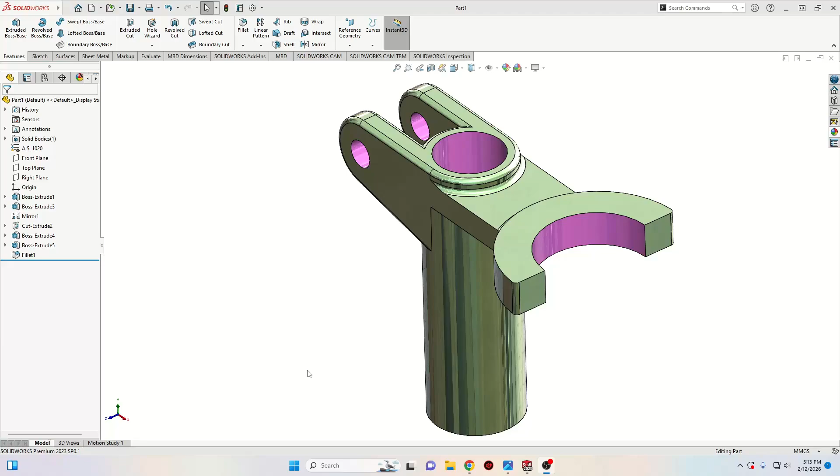My name is Alex and today we're gonna make this easy exercise in SolidWorks. And we have here the drawing. This is it. And let's go ahead and do this. First, let's open a new SolidWorks document, select your part and press OK. Now let's make this plane white.

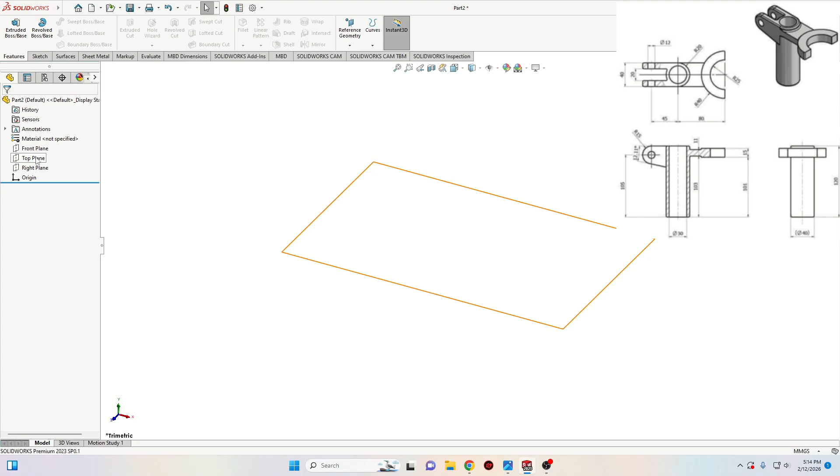Now we'll start with a sketch in the top plane. And here we'll make two circles. So select circle, make two of them like this, and now with smart dimension let's define them. First, this one, the small one, will have the diameter 30 millimeters. And the big one will have it 40.

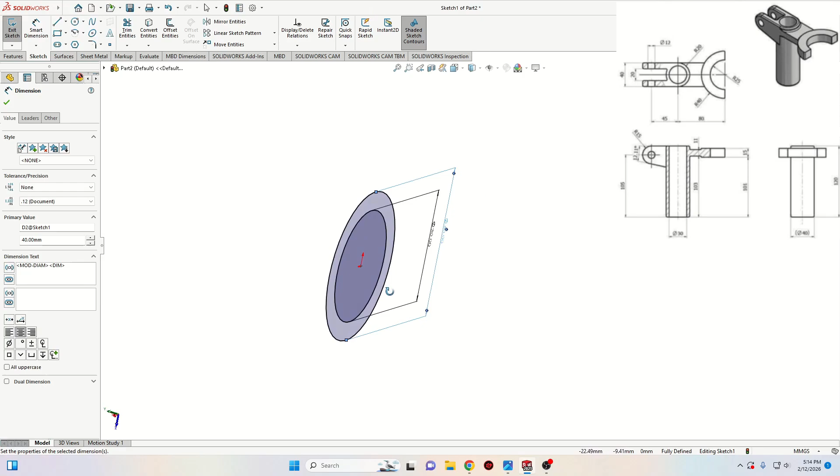Now let's go to features. And let's use Extruded Boss Base command. And here we're gonna keep it blind and the depth will be 120 millimeters. Press OK.

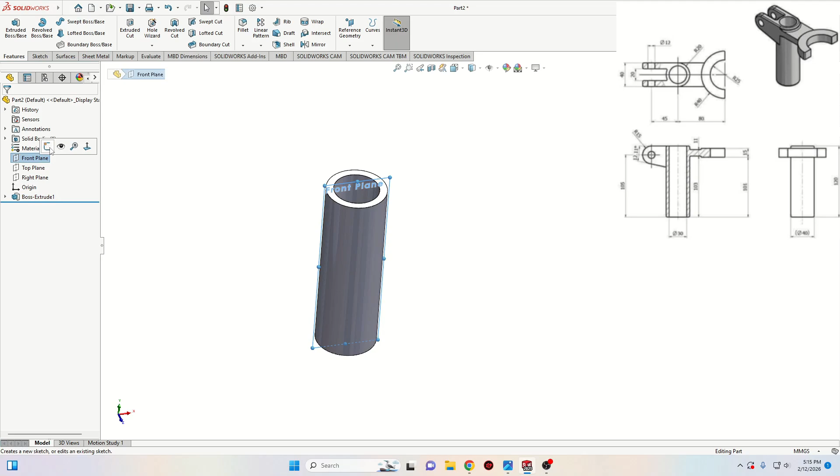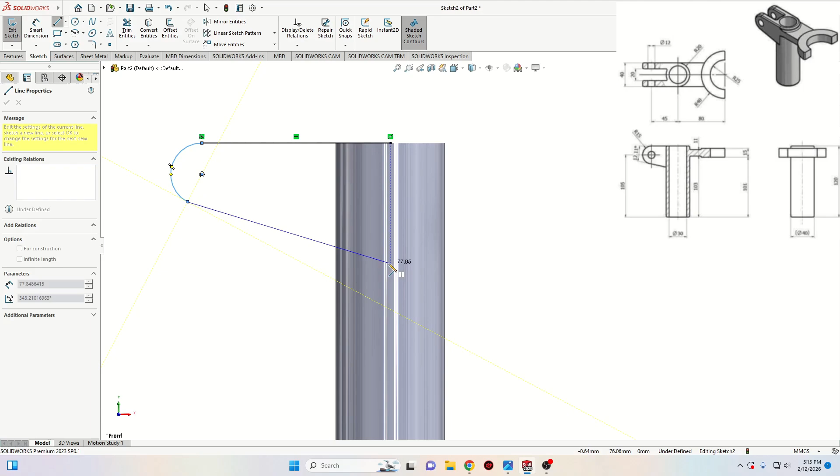Now let's open a new sketch in the front plane. And here select line and let's make the next sketch. We're gonna start from this midpoint and we'll go like this, and then we'll make here an arc. So if you go away from this point and then you go back, the line will transform into an arc. Let's make here an arc and then we'll close the sketch like this. One line here and one back up to this point.

Now select this point and select here make tangent. Alright, now with smart dimension let's give some dimensions. First, from this center point to this line here will be 45 millimeters. And then this arc will have the radius 15. And now the angle from this line to this one here will be 12.11.

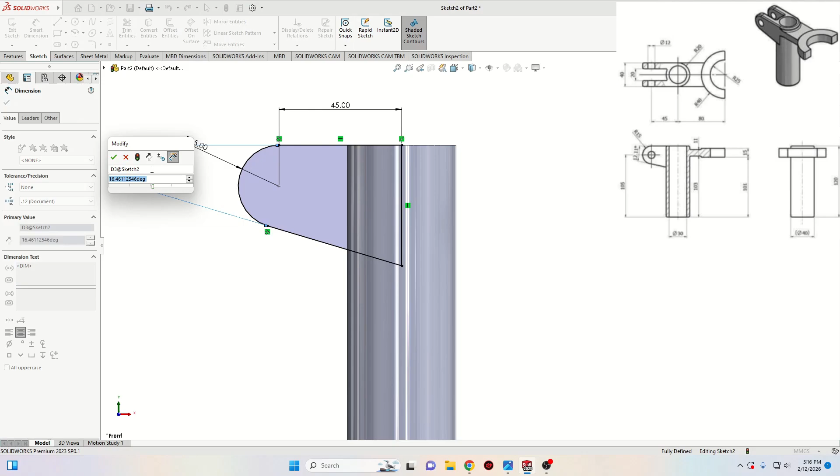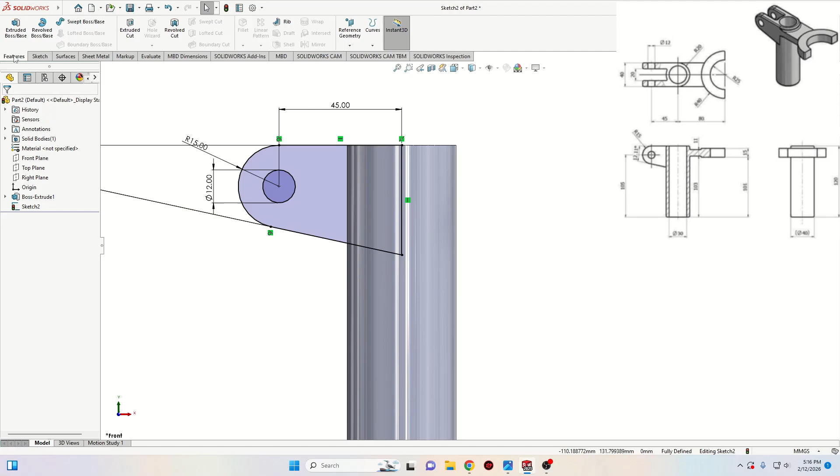Now select circle and let's make here another circle. This one will have the diameter 12 millimeters. Now let's go to features and use Extruded Boss Base command.

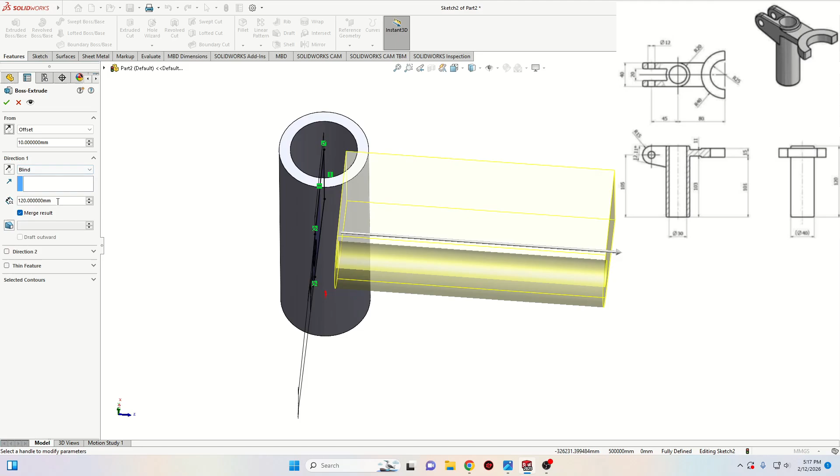Alright. Now here we'll have to change some of these settings. First of all, we'll have to change here, instead of sketch plane, offset. The offset will be 10 millimeters. Make sure that it's like this and not the other way around. Alright, here we're gonna keep it blind and the depth will be also 10. Now press here OK. And this is looking good.

Now we'll have to mirror this on this other side. To do that, we'll go up here to linear pattern and click on this arrow. Here we'll find mirror. And click on it. Now we'll have to select here the mirror face plane. And we'll click on this arrow. And from here we're gonna choose front plane.

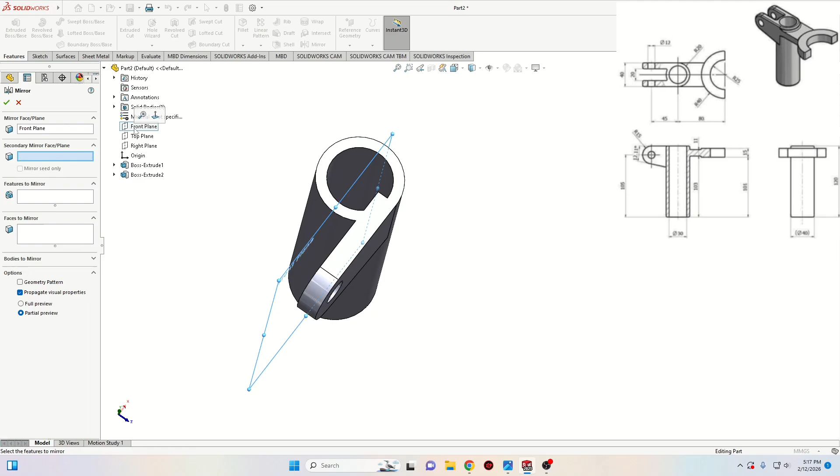Okay, now the features to mirror will be this part, which is the last boss extruded. Select it, and now we should be able to see the preview. If you cannot see the preview, select here this one. And now press here OK.

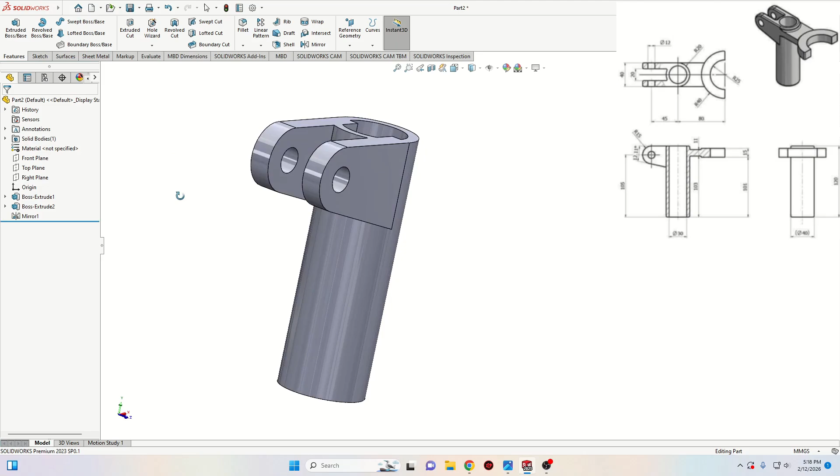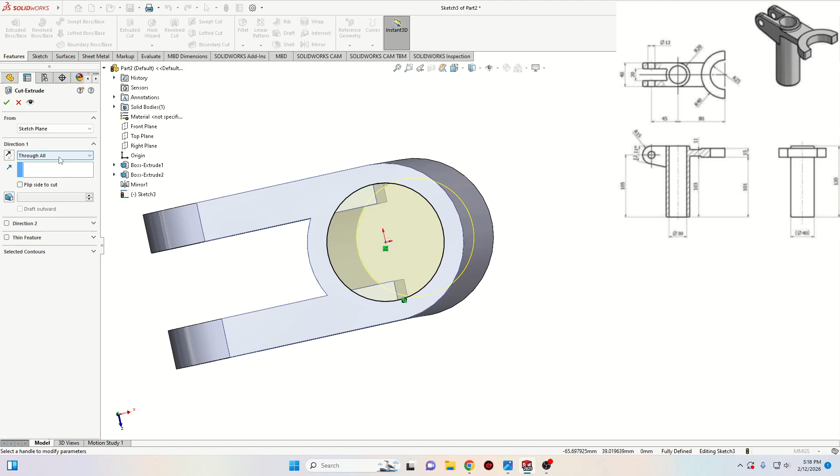Alright, now we can see that we have this extra material inside and we want to cut it. Select this face, open a sketch, select circle, and let's make here a circle. Select this circle with this edge and select here make coradial. Now go to features and use Extruded Cut, and here we're gonna keep through all, press OK, and it's clean.

Alright, now the next thing we'll have to do is to open a sketch on this face again. And here let's select this arc and select here convert entities command. Now we'll select line and let's make these three lines like this. Starting from these points, make sure that we have here this tangent.

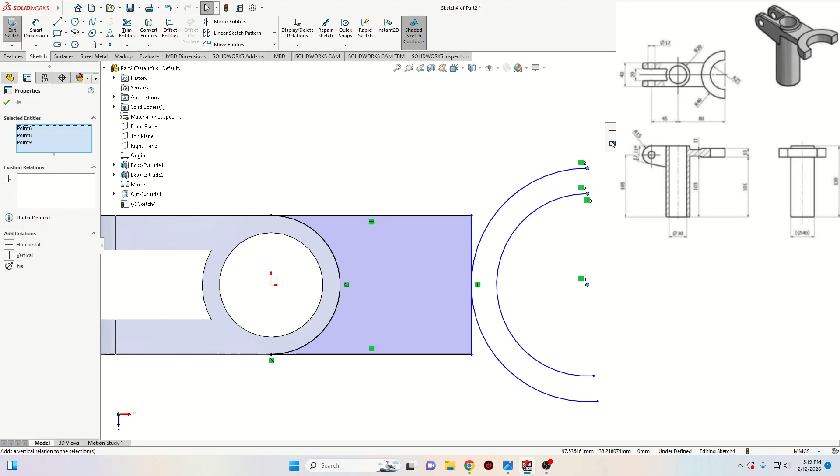Alright, and now let's select center point arc, and let's make here an arc. One like this, and then another one a little bit smaller. Now select these points and select here make vertical. Do the same with this. Okay, now select line and let's close this. Two arcs like this. And now with smart dimension, let's define them.

First, this one will have the radius 40 millimeters. And this one will have the radius 25. From this center point to this one here will be 80 millimeters. And now we should select this center point with this one and select here make horizontal. Now we'll use trim entities command to cut these extra parts of the lines. We don't need them.

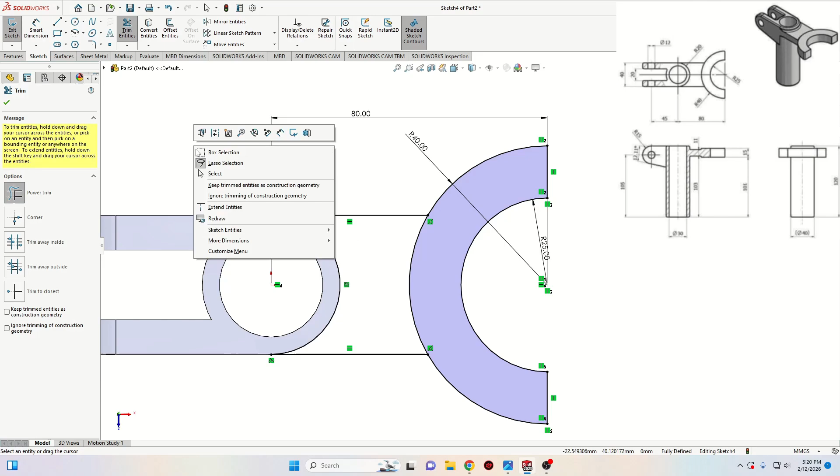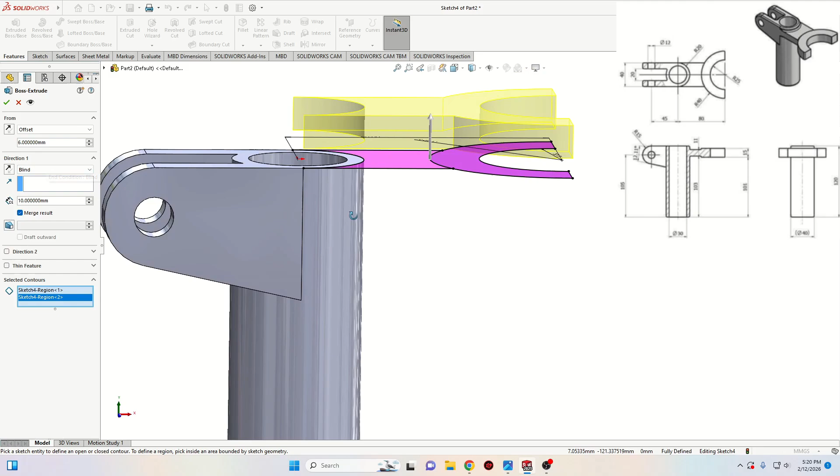And now let's go ahead and use from features extruded boss base command. And we'll have to select these two profiles that we want to extrude. And now again we'll have to select here instead of sketch plane offset. And the offset this time will be 6 millimeters. Make sure that the offset is going down and not above our part. We'll have to click here on this to change the direction.

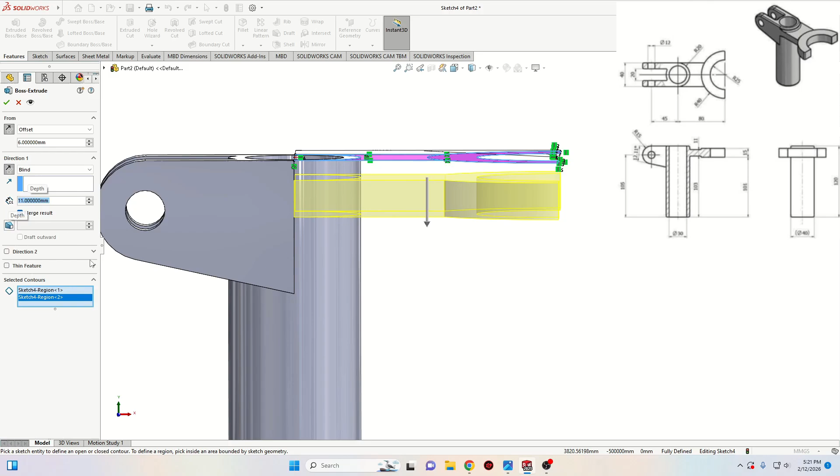Now the extrusion we also want it to go down, and we'll have to change here the direction also. Now the depth of this extrusion will be 11 millimeters. So here should be 11. And now press here OK.

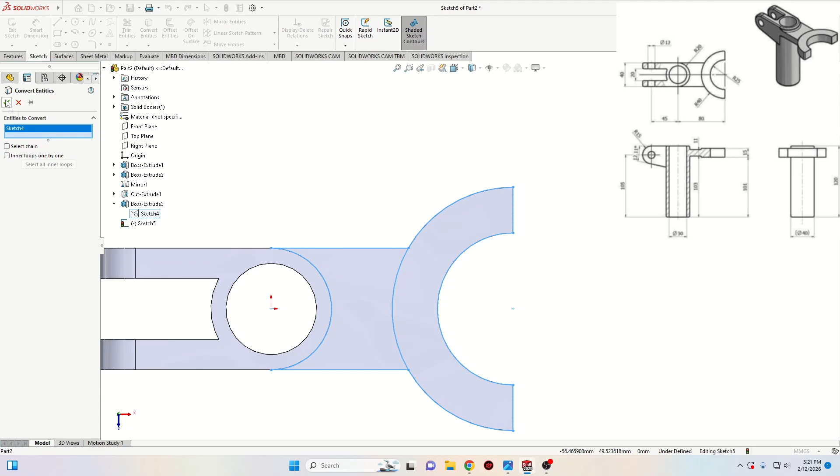Now we'll have to open a new sketch on this face this time. And here we want to convert from the last sketch this part with these two arcs into our new sketch, so we don't have to make them again. To do this, we'll go up here to convert entities command. We'll click on this arrow. We'll go to Boss-Extrude3, click on this arrow, select the sketch, and we can see it selected here. Then press here OK. Now we have the sketch converted into our new sketch.

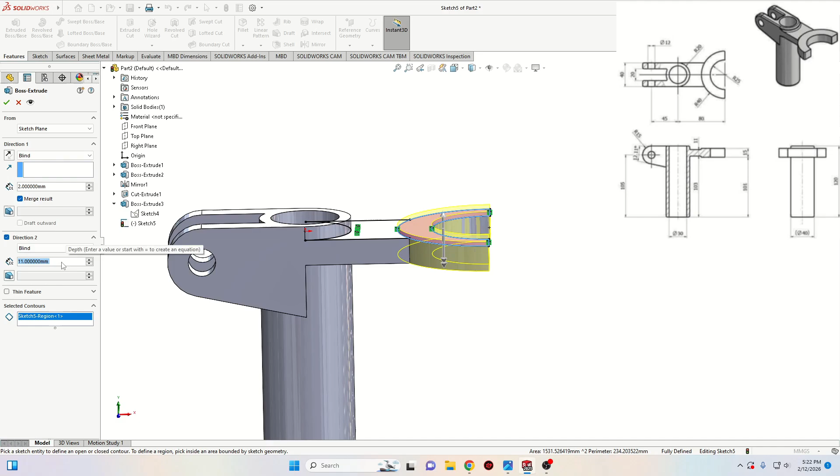Now what we want to do is to extrude only this profile. To do that, we'll go to features, extruded boss/base command, and we'll only select this one, not this one also. Now here we want it to be for the direction 1, 2 millimeters. And for the direction 2, we want it 13 millimeters. In total should be 15. Press OK.

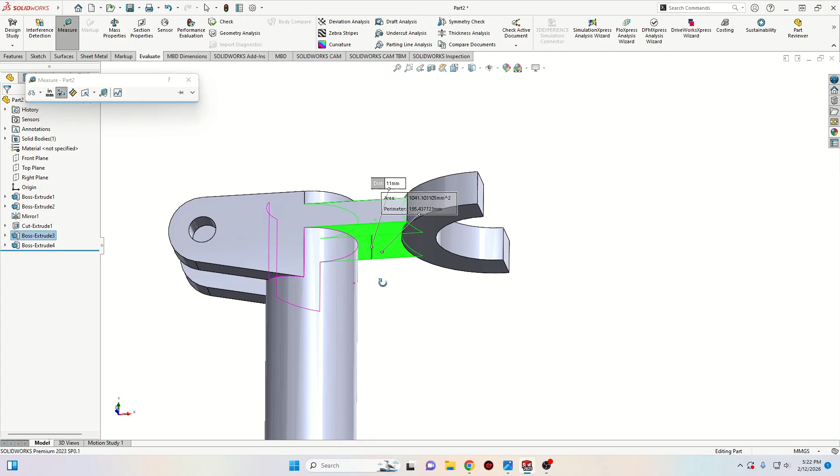And now this should have the thickness 11 and this one 15. If we want to make sure that it's right, go to evaluate, go to measure, and let's see, click on this face and this one. We can see here 11. Do this again. But for this one, and we can see here 15, which means that it's okay.

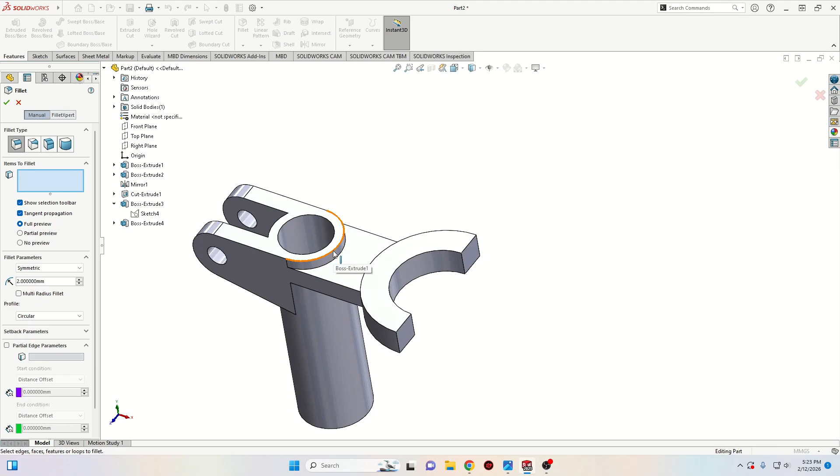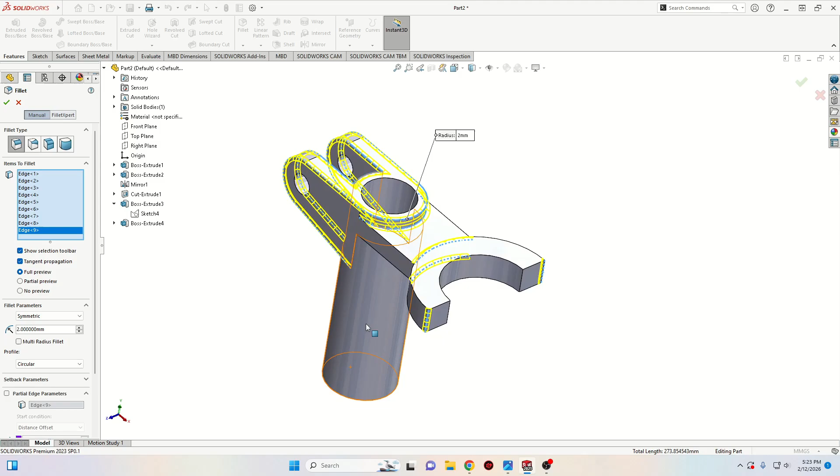Now we'll have to apply some fillets. So let's go ahead and select fillet. The radius will be 2 millimeters. And we'll select this with this one, this, a few edges here and there. And this one, yeah. And I think this should be all. Now press here OK, and this is it.

This is our part for today.